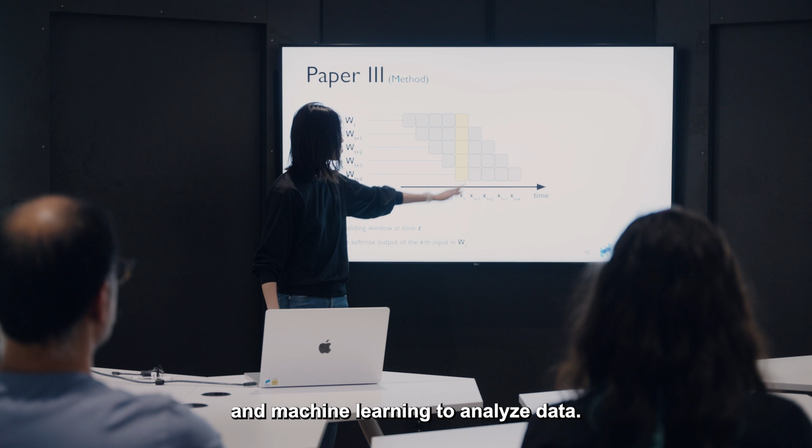CAISR is a research environment at Halmstad University where for many years we have been using AI and machine learning to analyze data. We collaborate with a lot of world-leading partners in many different industries. One of our partnerships is with Toyota Material Handling.

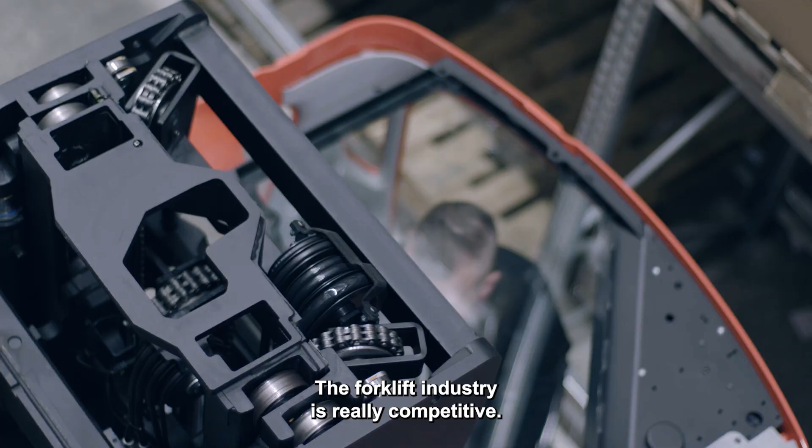The forklift industry is really competitive. All the competitors are able to do more or less the same things with the hardware. To be able to compete in the future, we really need to embrace AI and machine learning. We can develop a lot more services that we can offer the customers by using the data that we already have.

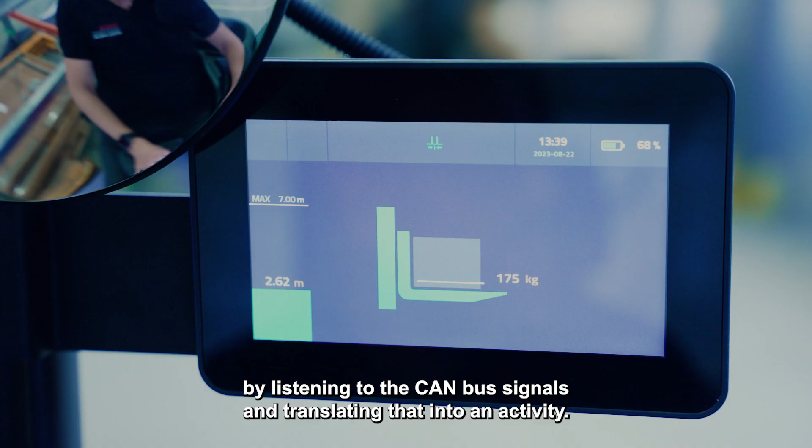We try to understand what the truck is doing by listening to the CAN bus signals and translating that into an activity. That could be driving without load, getting a load, driving with load, and leaving a load. For the customer, the benefit is that they would get a much more detailed view on how they are actually using the truck.

It's a complex challenge. We don't really exactly know how we can find the patterns. We have a big variance between different customers, different warehouses, different drivers. We have tried to specify rules, but then as soon as the driver starts to do something that is just a little bit outside the intended usage, those rules will fail.

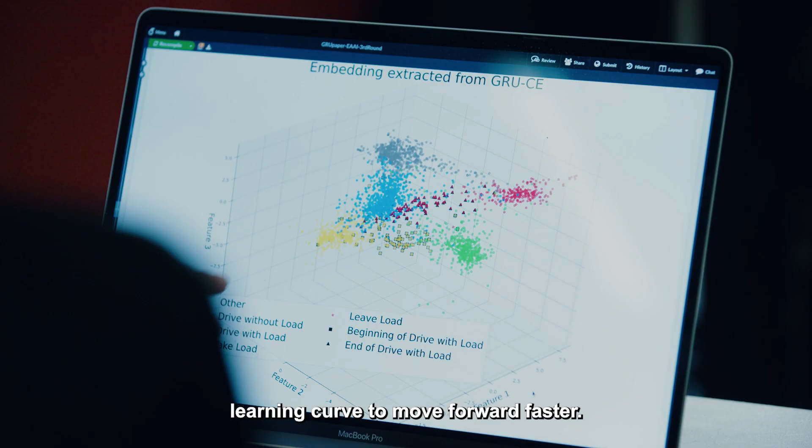Halmstad University is one of the leading universities within a data-driven approach. By engaging Halmstad, we got a boost in that learning curve to move forward faster. We are collaborating with Toyota Material Handling on a project called activity recognition.

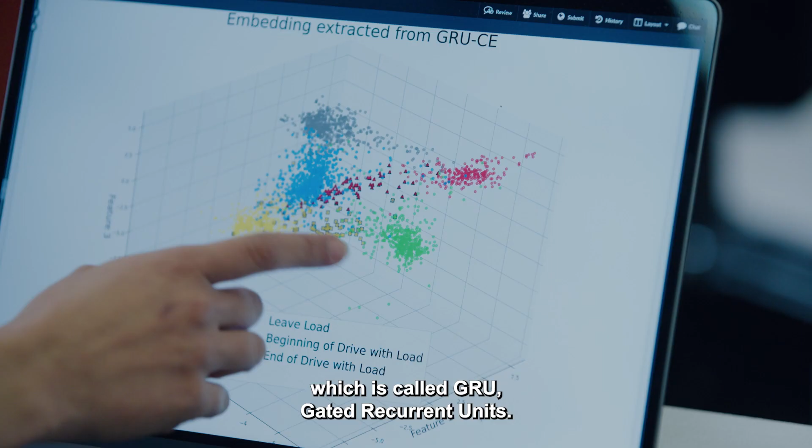We have tried several different techniques, normal deep neural networks or DNNs, and then in more recent work that we have published, we have been looking at a recurrent neural network called GRU, gated recurrent units. The challenge is in overlapping activities. Sometimes the driver performs two activities in parallel, turning the truck, meanwhile lifting the fork.

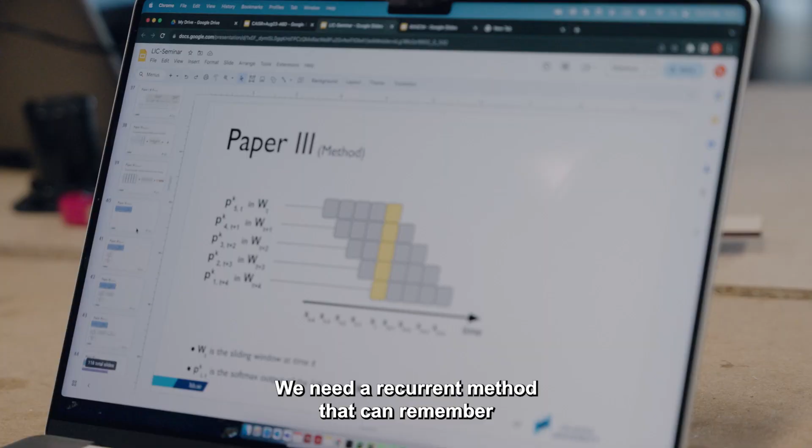If we translate this into machine learning language, for some of the data we have one label, but during the overlapping activities we have two labels. That will confuse the model. So applying a machine learning model that can only capture the current moment will not work. We need a recurrent method that can remember the contextual information to help us to understand the current moment.

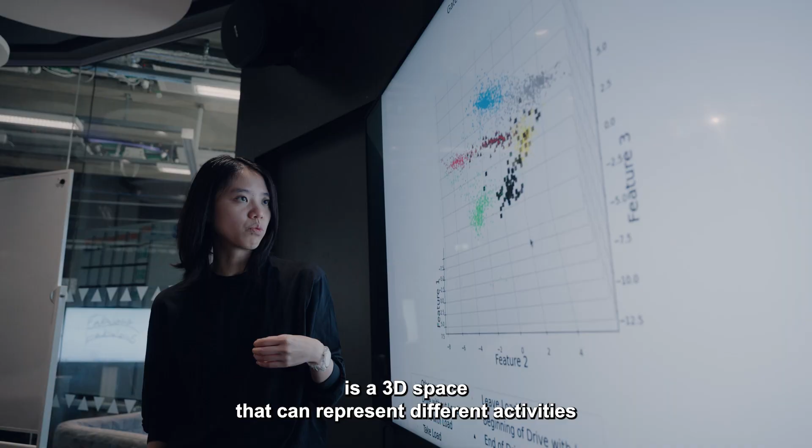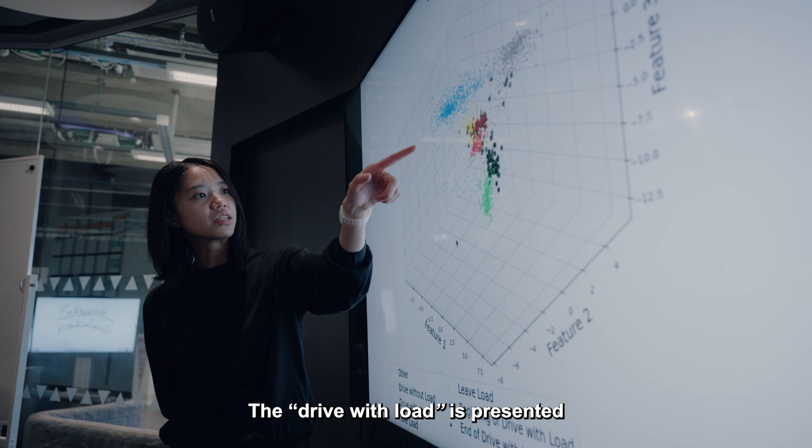What we end up with is a 3D space that can represent different activities and also different activity transitions. And in that sense, we can draw decision boundaries deciding which data belongs to which activity. The drive with load is presented with the yellow cluster here, and then the leave load is the red one. And you can see all these small triangle dots in between. Those are the transitions. Without AI, we couldn't deliver such a stable, cheap, but also accurate monitoring of forklift usage.

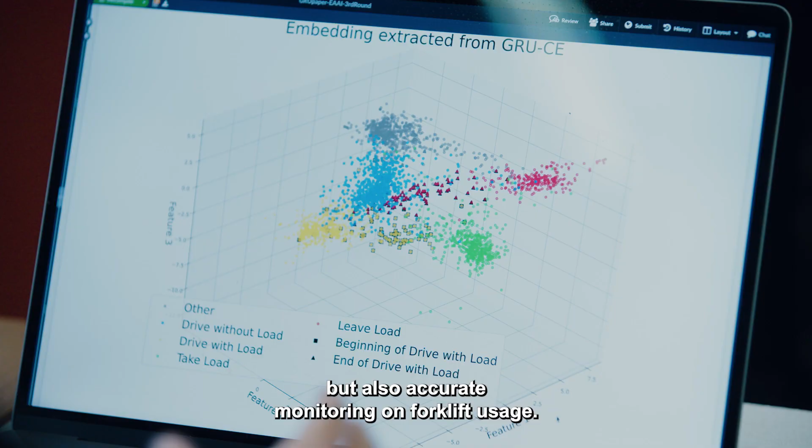We have been comparing our results with the rule-based techniques, and usually the methods that we are developing better capture the transitions between the activities compared with the baselines and rule-based techniques.

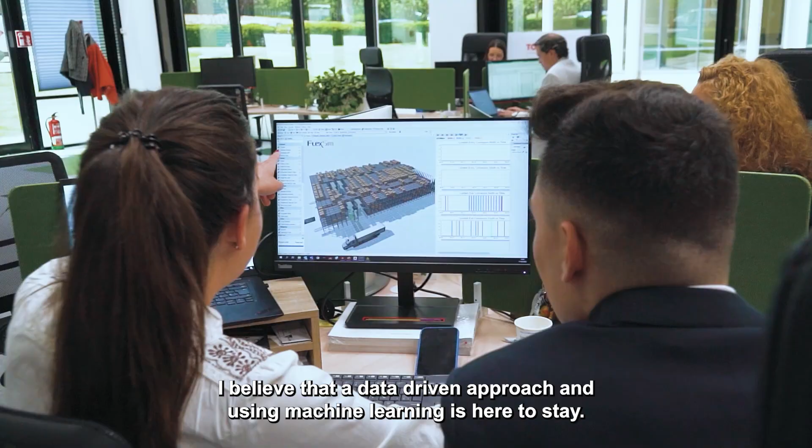Collaborations like this with Halmstad University are very important for us, making it possible to develop new services and new knowledge, I would say. I believe that a data-driven approach and using machine learning is here to stay. It will be more integrated into our forklifts, it will be running on our forklifts, and it will eventually lower the cost for our customers.

We see a lot of opportunities within predictive maintenance where we can mix the activity recognition with data from other systems to be able to forecast when it's time for service, which will allow us to give a better service and decrease costs for the customer. We are close to a point where we will have more compute power on the forklifts, which will enable us to do edge computing. Edge computing means that we can take the research, the models that we developed together with Halmstad, and put that on a forklift.

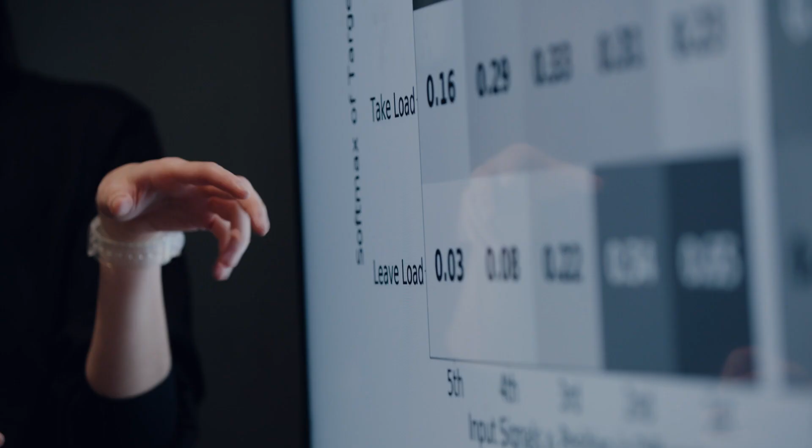The AI revolution will really change how we do things, the same way that steam and electricity changed it before. But now, instead of physical power, we are talking about mental power, about the ability to understand things we could never understand before. And CAISR is at the forefront of bringing new scientific findings to our industrial partners for real-world applications. There is no limit to what is possible with AI.